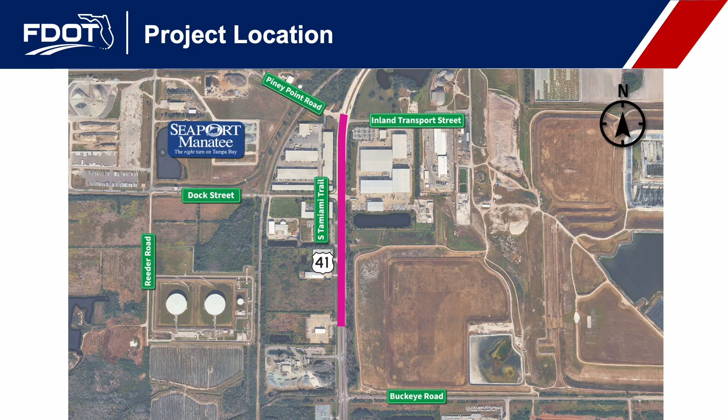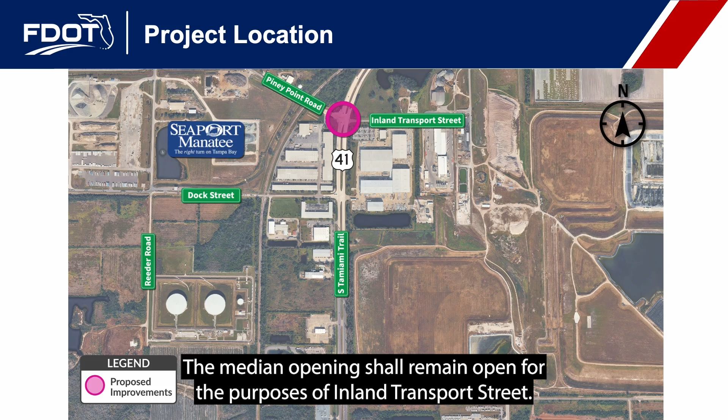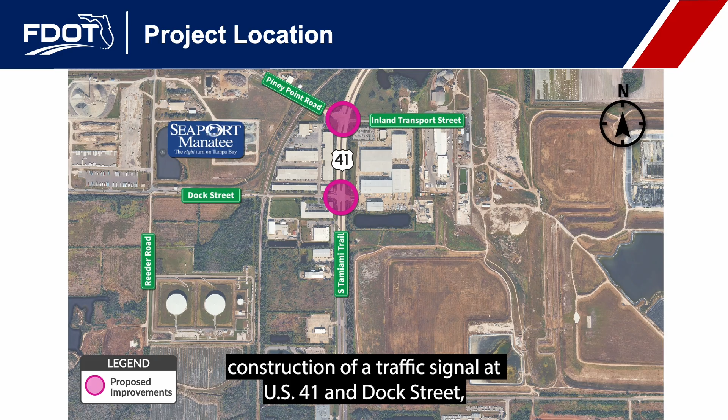FDOT is proposing improvements at intersections along US 41 from south of Dock Street to Piney Point Road in Manatee County. These improvements include construction of a raised island and traffic separator at the end of Piney Point Road for traffic exiting SeaPort Manatee. The median opening shall remain open for the purposes of Inland Transport Street. This modification will only impact traffic from Piney Point Road. Construction of a traffic signal at US 41 and Dock Street, and a newly signalized U-turn location south of Dock Street.

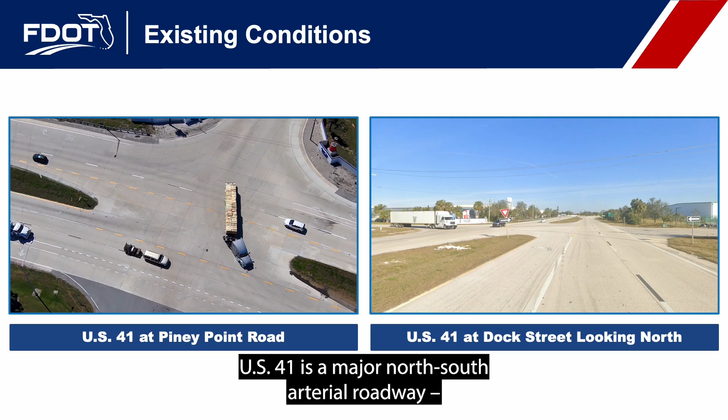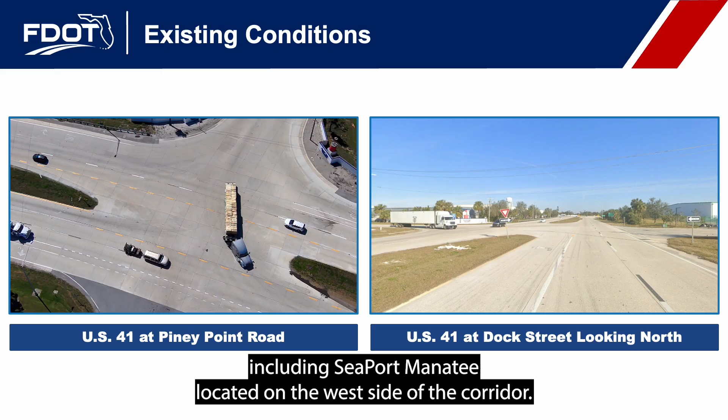US 41 is a major north-south arterial roadway, busy with local traffic, industrial vehicles, and large trucks. The project area is a mix of industrial and commercial uses, including SeaPort Manatee, located on the west side of the corridor. The port serves as a major economic driver for Manatee County, with container and cargo operations that generate substantial heavy truck traffic on US 41.

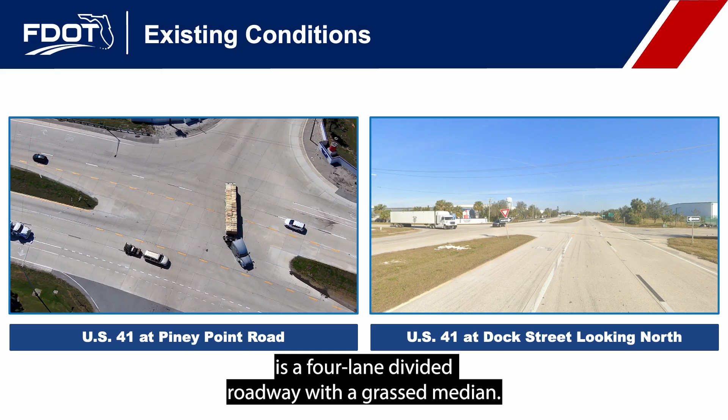Piney Point Road and Dock Street provide access to US 41, connecting the north and south gates of the port. Within the project limits, US 41 is a 4-lane divided roadway with a grassed median. The posted speed limit will be 55 miles per hour.

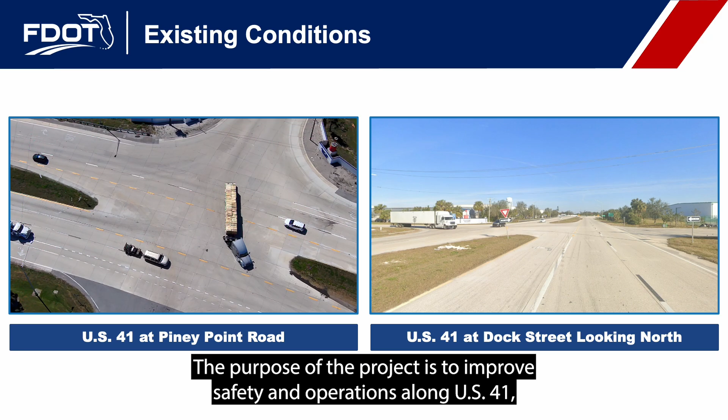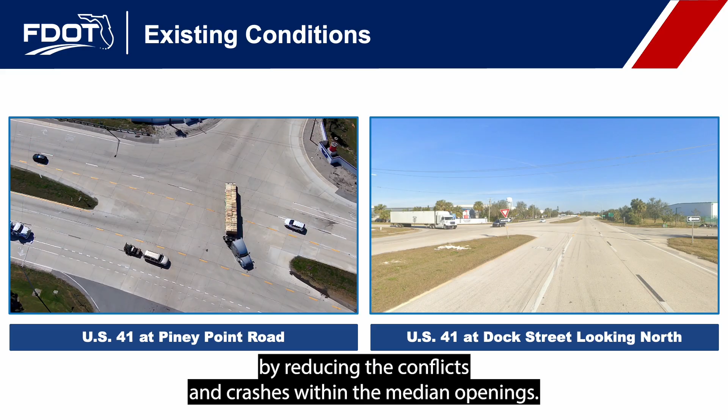The purpose of the project is to improve safety and operations along US 41, specifically at the Piney Point Road intersection, by managing access. These safety improvements will simplify the decision-making for drivers by reducing the conflicts and crashes within the median openings.

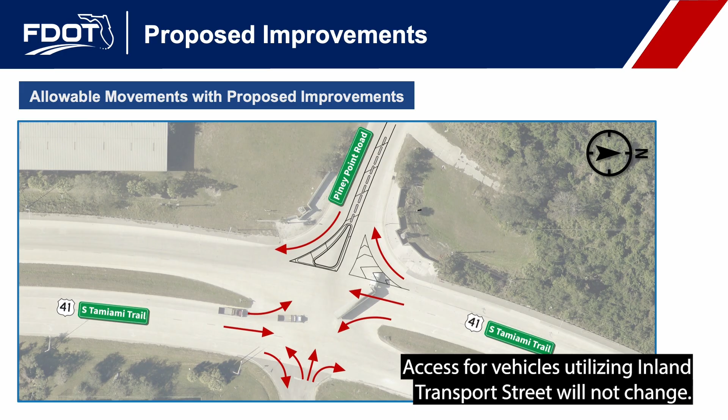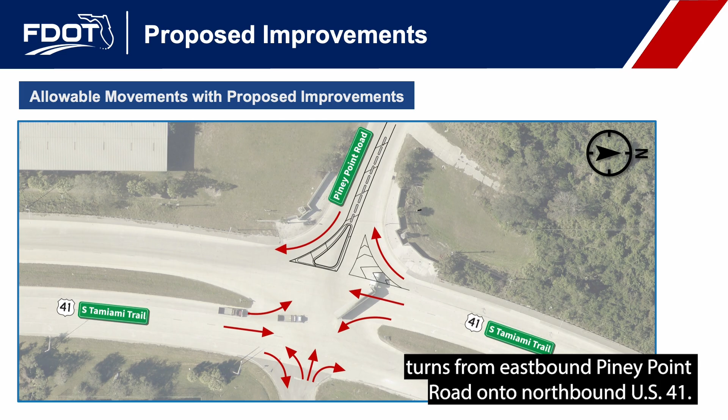The median opening on US 41 at Piney Point Road will remain fully open. Access for vehicles utilizing Inland Transport Street will not change. However, these proposed improvements will prohibit left turns from eastbound Piney Point Road onto northbound US 41.

We will now discuss the proposed improvements, including concepts, historical crash information, and rerouted turning movements. Exhibit boards with this information, along with collision diagrams, are on display at the in-person meeting. Virtual attendees can download these exhibit boards through the Documents panel on GoToWebinar. They can also be viewed on the project website.

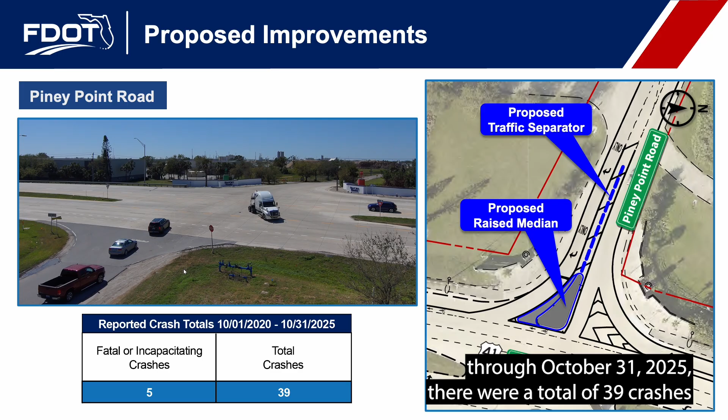The proposed improvements at this intersection include constructing a raised island and traffic separator at the end of Piney Point Road. At Piney Point Road, from October 1, 2020 through October 31, 2025, there were a total of 39 crashes, including 5 fatal or incapacitating injury crashes.

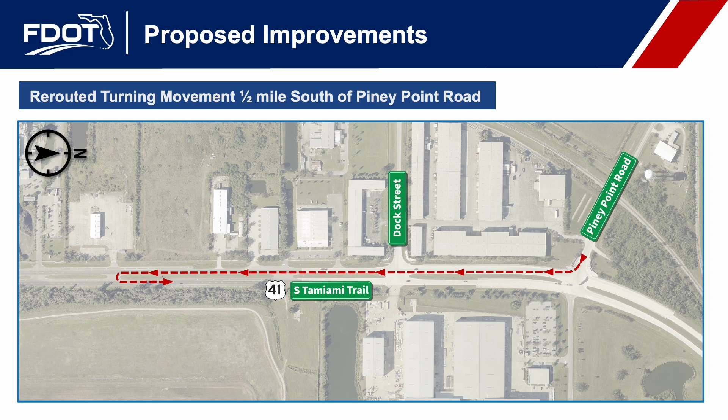Eastbound vehicles on Piney Point Road wishing to go north on US 41 will be required to turn right onto US 41 and make a U-turn approximately half a mile south of Piney Point Road at a newly signalized median opening. This newly signalized U-turn location will include additional asphalt necessary for semi-trucks to make the U-turns.

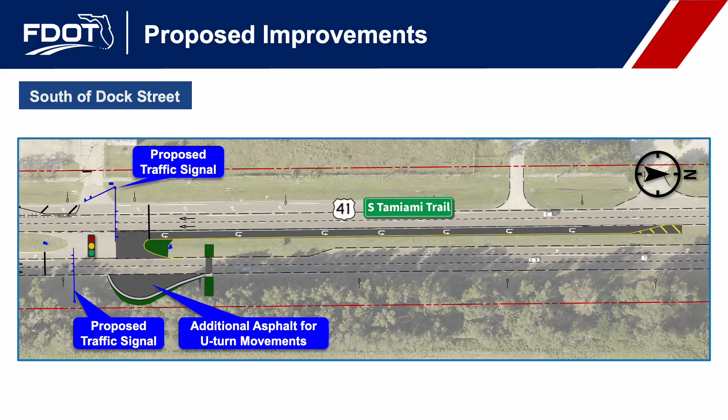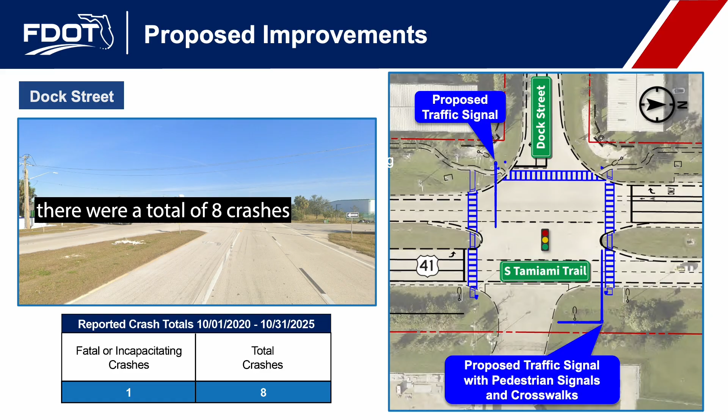A new traffic signal with pedestrian signal and crosswalks is proposed at the intersection of US 41 and Dock Street. From October 1, 2020 through October 31, 2025, there were a total of 8 crashes at Dock Street, including 1 fatal or incapacitating injury crash.

During the design process, FDOT evaluated the potential installation of a traffic signal at Piney Point Road. Based on this evaluation, a traffic signal is not recommended due to several limiting factors.

Because the intersection is located on a horizontal curve, drivers have limited sight distance and may not see a traffic signal ahead. The curve can also alter a driver's depth perception and alignment, making it more difficult to judge the signal status. Additionally, the existing superelevation, or the tilt of a roadway on horizontal curves where the outside edge of the road is raised higher than the inside edge, creates a significant elevation difference between the northbound and southbound lanes at the intersection, creating design challenges.

Superelevation helps vehicles stay safely in their lane while traveling through a curve, but it encourages higher driving speeds and is designed for continuous movement rather than stopping. Traffic signals are unexpected in locations meant for higher speed, uninterrupted flow. Stopping on a sloped roadway can make it harder for drivers to maintain control, increasing the risk of serious rear-end crashes.

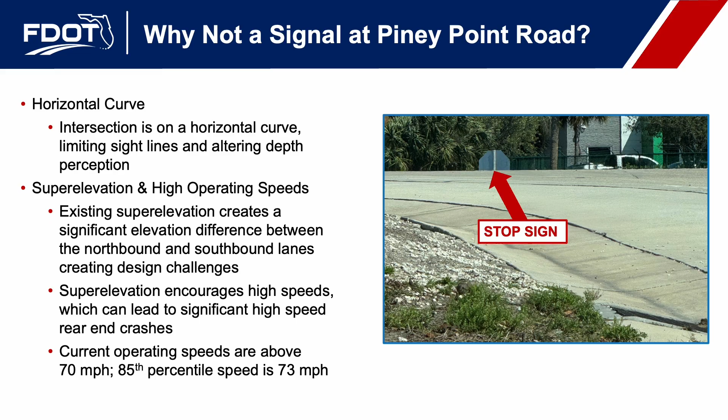Trucks making left turns, such as those turning from Piney Point Road onto northbound US 41, have a higher risk of rollover. A traffic signal may worsen conditions by encouraging trucks to make the eastbound to northbound turn at higher speeds. With current traffic speeds and drivers trying to beat the light, there is a higher risk of red light running, which could lead to serious crashes.

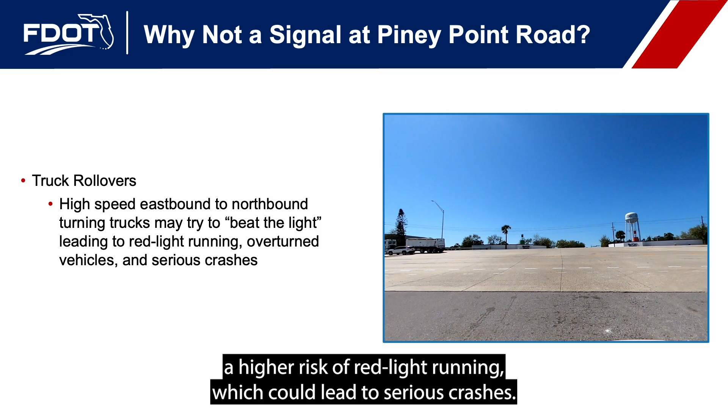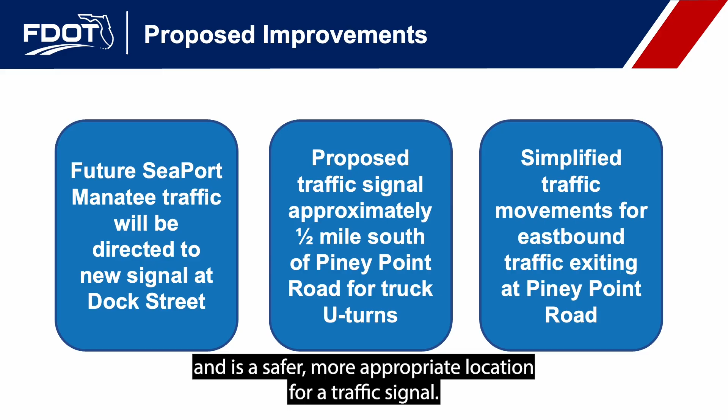FDOT is working with SeaPort Manatee to direct most future traffic to Dock Street. Since Dock Street is a flat and straight intersection, it offers better visibility and is a safer, more appropriate location for a traffic signal.

While the port is in the process of shifting traffic to Dock Street, there is a need to address eastbound traffic exiting via Piney Point Road. This will be addressed by providing a signalized U-turn south of Dock Street, approximately half a mile south of Piney Point Road, offering a simpler and safer movement. Instead of crossing both directions of traffic to turn left, trucks will turn right and merge only with southbound traffic, making for easier decision-making by requiring drivers to look for a gap in just one lane of traffic.

Now that we have reviewed the proposed improvements, let's address a few additional questions. Why isn't a roundabout being considered at these intersections? A roundabout is not feasible at Piney Point Road due to the existing superelevation, the significant difference in roadway elevation, and the large amount of concrete pavement located at the intersection. A roundabout at Dock Street is not feasible within the existing right-of-way, as it would not accommodate future traffic demands.

How will the transport of large tanks from Honeywell crossing at Dock Street be accommodated? The traffic signal design at Dock Street will be modified to allow space for these tanks to cross US 41 safely.

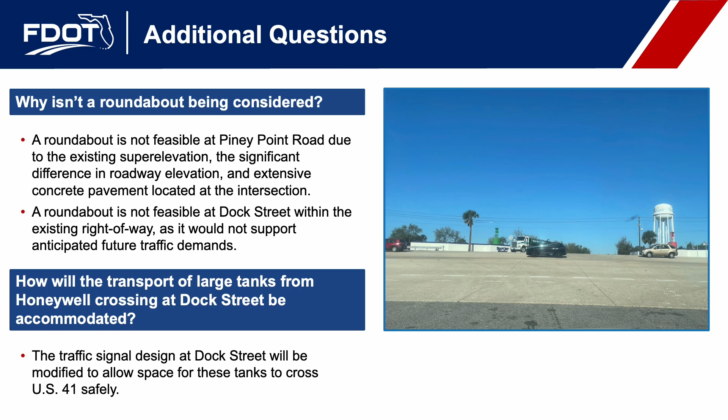Why can't trucks make U-turns at Dock Street? There is insufficient space at Dock Street for southbound U-turns. Additionally, trucks exiting Piney Point Road do not have enough distance to safely merge into the left lane to make a U-turn.

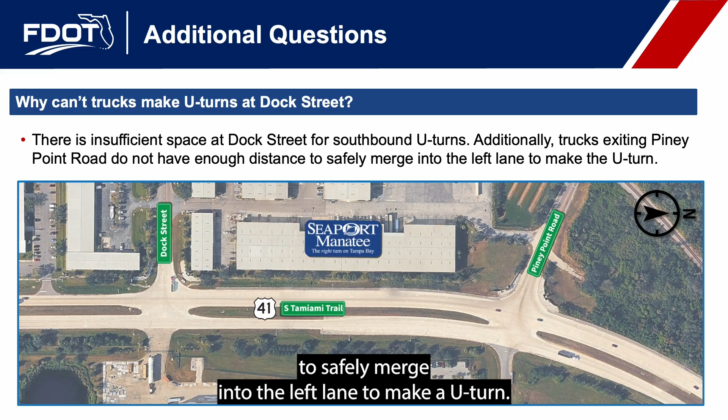Will there be space for trucks to make U-turns at the newly signalized median opening? Yes. An asphalt loon, or pavement that is constructed outside of normal traffic lanes to allow for larger vehicles to safely make a U-turn on a divided highway, will be constructed at the signalized U-turn location half a mile south of Piney Point Road. This is designed to accommodate semi-trailer trucks.

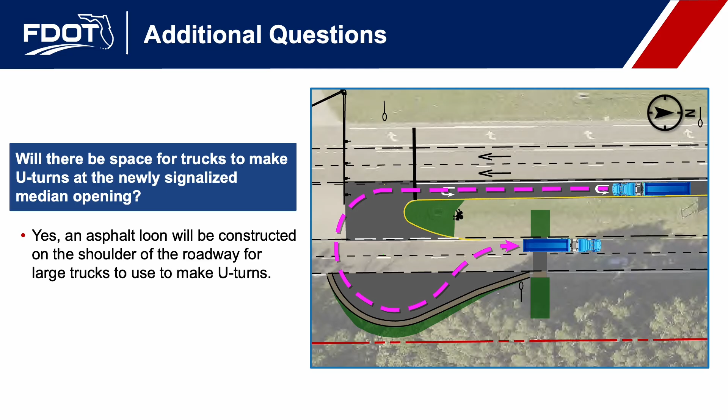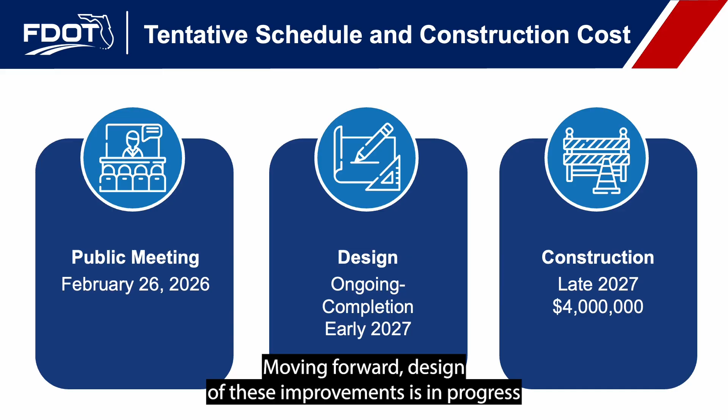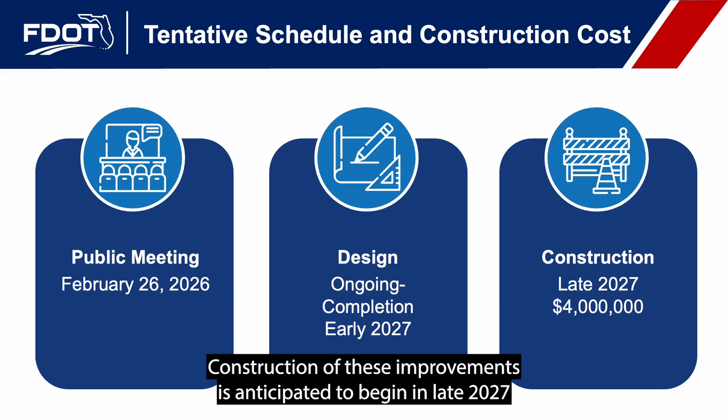Today, we are conducting both the virtual and in-person public meeting for these safety improvements. Moving forward, design of these improvements is in progress and anticipated to be complete in early 2027. Construction of these improvements is anticipated to begin in late 2027 at an estimated cost of $4 million.